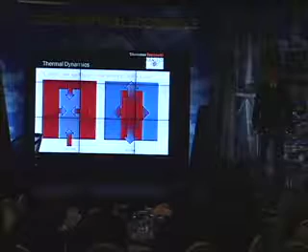And let's start with the thermal envelope, the building envelope, which is the facade, also the roof, but also elements below ground. Everything that separates the building from the outside, where we have the uncontrolled climate, to the inside, where we try to maintain a controlled, comfortable environment. And when we talk about thermal efficiency, what we're talking about is our desire to limit the transfer of heat.

So these are two very simple diagrams that illustrate a building. On the left side, you see a building that you would like to remain cool, and on the outside it is warm. And just in terms of fundamental physics, the warmth will never stop trying to get into the building. Imagine the building was underwater. The water would never stop trying to get into the building. You have to constantly pump it out, so you have to constantly work on keeping a building cool.

Otherwise, if you do nothing, there will eventually be an equilibrium, and the building will have the same temperature on the inside as on the outside. And the reverse logic applies in the winter, in cold climates, when you heat the building, you have to constantly work on keeping the cold temperature out.

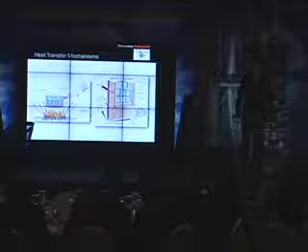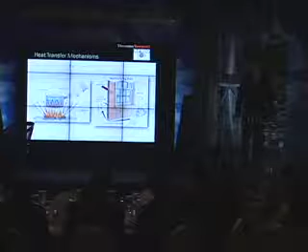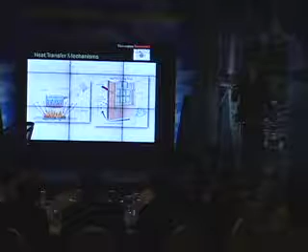So most people don't think a lot about that, but there are different ways heat transfer happens. There are three fundamental ways: conduction, convection, radiation. Conduction is, very simply put, if you put a piece of metal in the fire, the other end is going to get hot pretty soon too. Think about a pot on your stove. That's conduction. Molecules don't move, but they touch each other and transfer heat energy.

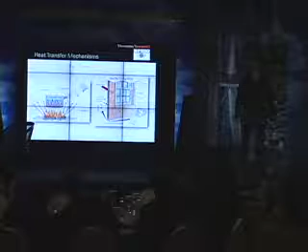Convection is the moving of air or of a liquid. So if you have a fan that moves air, that's convection. And then radiation is heat energy that travels through space, through a vacuum, like from a fire, from the sun, 150 million kilometers away, I believe, and it's still pretty hot here on Earth. Travels through space, doesn't need a medium.

And all of these mechanisms happen with respect to the building envelope. There's convection through a window, there's conduction through a massive wall, there's radiation through a window, and we have to deal with all of them. And the window is typically the weakest spot in the envelope. That's where we lose or gain the most heat.

And with modern windows, we have double insulated glass, and we have a whole range of smart layers in there at our disposal, but it still remains the weak link, and we want to limit heat transfer through it. So that's our job as building envelope consultants. Then there are various analysis tools that we can use, but the ultimate goal is still always the same.

There is the goal of minimizing heat transfer through the building envelope, and we have certain scientific values that we use to analyze that. There is R-value, R like resistance. There is a U-value, which is simply the inverse of the R-value, and there are certain ways to calculate it and to model it, and there are some fundamental principles that we would like to adhere to in order to make it as efficient as possible.

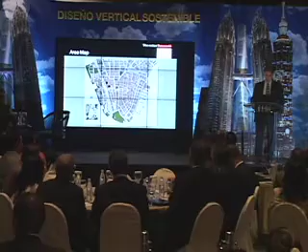I'll just start off with a little location diagram. This is downtown Manhattan. You can see the red boxes there are the two main towers, World Trade Center 1 and 2, in the site. That's a photo, obviously, before September 11th, 2001, and you can see the various buildings there.

And that morning, actually, we were in a conference room in my office, and we were having a meeting. It was pretty early, and in the middle of the meeting, one of our engineers kind of opened the door and he said, I don't know if you heard, but an airplane just hit the World Trade Center, one of the towers.

So we happened to have a television in the conference room, and we're thinking it was probably a two-seater plane or something like that, because years ago a little private plane hit the Empire State Building, nothing happened. So we turn on the TV, and just as we turn it on, we see the North Tower with all the smoke coming out, and then we see this other plane coming around. It was all on television.

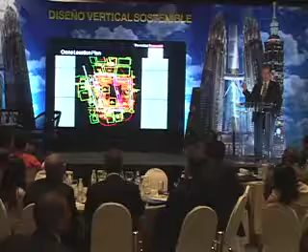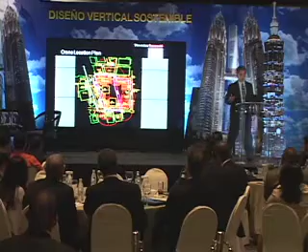Every morning at about 4 o'clock, we would have one of our engineers go around the entire site and identify where all the cranes were on the project, and what their capacity was. All these little boxes here, the greens, the blues, they're all cranes, and the circles are their reach radius. They kept moving every day, so we had somebody go around every morning just to keep track of where they were.

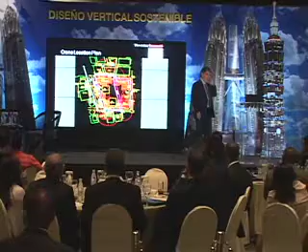Now, before we had all these cranes on the job, the contractors had to bring equipment to the project. Our first really big crane challenge was in this area between building 4 and 5. They had to put a crane here to reach over the slurry wall into the basement, in the pink. And we said, you really can't; there was a floor underneath, so it wasn't on the ground. This was a framed concrete slab, and it couldn't support this 300-ton crane.

Then one of the engineers realized there was a big sculpture in that area that weighed about 250, 300 tons. If we could get rid of that, we'd have enough capacity down below to put the crane. We had a demolition expert on the project, and he said, I can get rid of that sculpture in maybe half a day. We'll drill some holes, put some explosive in there. Well, it didn't work, so they had to chip it away. It took about 3 or 4 days. And we were able to get the crane on site. So that was the first one.

Then there were more and more cranes, bigger and bigger cranes. And one day, I think it must have been Bovis, they said, we need to bring an 800-ton capacity crane on the site. To get the reach into the middle, they had to put it right on the edge of the slurry wall. Now, we couldn't find any beams readily available that could support that 800-ton crane.

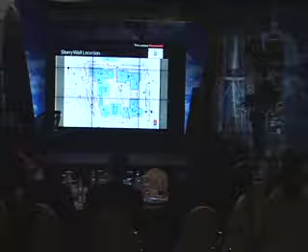That's the outline there, and it's 47,000 square meters in area, and it's 21 meters deep, 7 stories. So now, here's the subway lines that go to PATH. These go under the river to New Jersey, and then they all come back.

So if you remember when I talked about the top-down construction, where as you go down floor by floor, you put the slab in, and that keeps the walls from coming in, because this is 21 meters deep. If you have soil on one side, nothing on the other, soil's going to collapse the wall. So in the top down, you go one floor, you put the slab, go another floor, put the slab, and it braces these walls. Now, this wasn't built that way.

This was built by digging the trench around there, 21 meters deep, filling it with the bentonite clay, pouring the wall, and as they excavated, so the concrete wall is here, it's 1 meter thick. As they excavated, they would put tiebacks in. So they'd have these long cable anchors, and they drill them through here; there was nothing else here at the time. So they would put them down at angles, like probably in this tent, they probably have something like guy wires, okay?

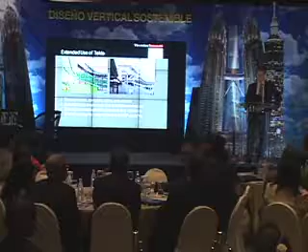So these are some of the statistics. You see 56 suites in the building, 14 lounges, and I think I got the numbers right. Design was 18 months. This was asked before. Construction 32 months. It was done very quickly. I'm not going to go too much into these foundations here. One of the reasons it went quickly is the use of Tekla, which is building information management software. And so we're able to model everything. We actually detailed the connections on this, so it saved a lot of time.

Here you see the model on the left, the actual construction on the right. This is the Great Hall, if you've been to Yankee Stadium. On the left, obviously, during construction, and on the right, in fact, that's me with the white hat there. This was a week before the opening, that's why all those banners are up now. And actually, if you look on this side, these are black and white, and I think these are the older players. And then the other way, they're in color, the newer ones. But it's an amazing space.

These are the upper deck columns, and the reason I showed these is the Yankees didn't want straight columns, okay? They wanted a Y for the Yankees, okay? So we have Y columns.

Now, one of the pretty exciting things here was the frieze up above, okay? This is like a Yankee logo, almost. On the left is the original stadium, and on the right is the new one, and the original frieze was copper, and it was just connected, it was not structural, it was connected to a supporting structure. The new one, we had suggested, why don't we just make it a structural element out of steel tubes, and you just have one piece, and we did that.

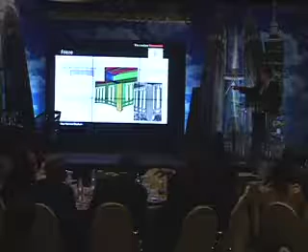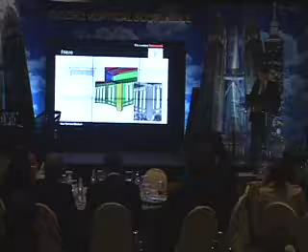And you could see, the left is the drawing, middle is the computer model, and on the right is the actual construction. And all the connections were made on the back side here, so all those bolts don't show from the field when you look at it. And it's all structural steel, it's structural supports, the lights and the catwalk all around, so it's actually a structural element. We have cantilevered beams coming out, and it stabilizes those at the end. So it has a real structural function. And that's on the right, the old and the new.

Some of the shots here, the concourse level, this is what it looks like on the inside, and the red on the bottom is the concourse level, and then we have the reserved concourse, and then the upper concourse, and then the suites. You can see on the left all these boxes here. These are all the suites, all around. And some of them are pretty luxurious. If you've been there, they have some really nice restaurants and everything. It's quite a structure.

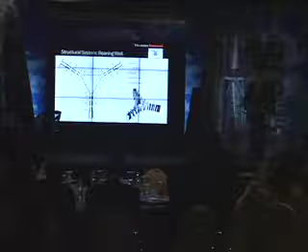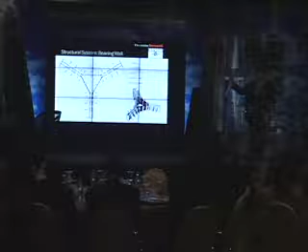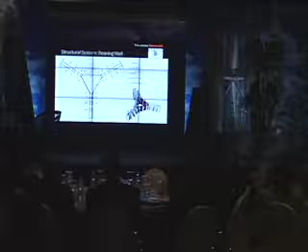You have these end walls, and then you have the corridor walls, and you have fin walls, and you have the triangular core. And these all work together to resist the lateral load. The core, just to get a sense of the scale, well, not that important. I think it's 37 meters on a side. Anyway,

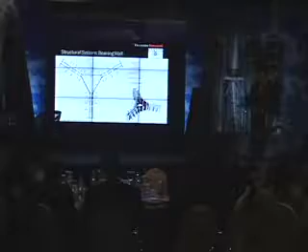It's called the Sky Terrace, and originally the owner wanted to make that a helicopter pad, a helicopter landing. And that's about 600 meters up, 25 meters in diameter. And then they talked to some helicopter pilots, and they said that's not a good idea to do that. But the owners liked it, so they said, well, let's keep it. So it's actually going to be like an observation tower up there. So, anyway,

the analysis: we were talking to somebody during the break about what analysis software to use. Well, on this kind of a building, we use 3 different independent types of analysis software. You've got to get this right. So, wind tunnel testing. We did 1, 2, 3, 4, 5 wind tunnel tests, and we had it with RWDI, who I mentioned earlier, and then we had another wind tunnel testing laboratory do another wind tunnel test just to check it. And these are all different types of tests.